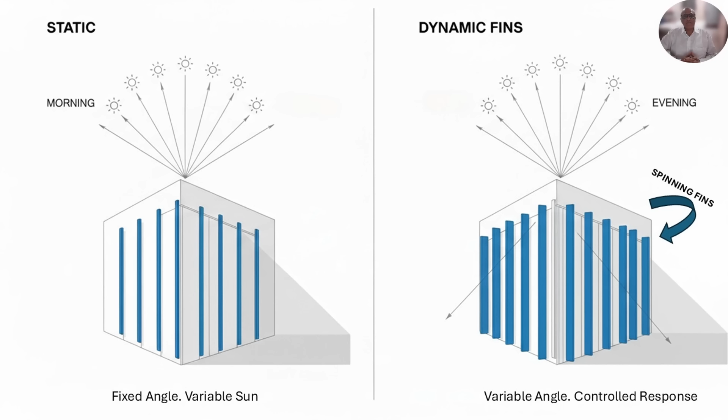On the left, a static system. The sun moves from morning to evening. The fins do not. So shading performance keeps changing, but the facade remains fixed. On the right, dynamic fins. The sun position changes and the fin angle responds. Instead of designing for a one-time condition, we design for the entire solar cycle. The difference is not movement, the difference is control.

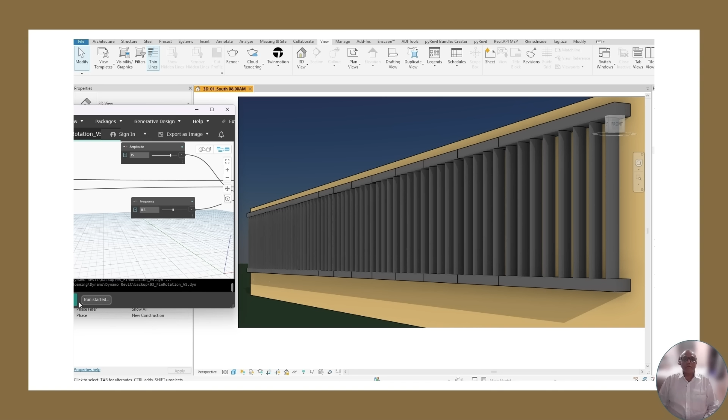This is not animation, this is model-driven logic. Here the time setting is changed inside the sun study. Each time the sun angle changes, a Dynamo script recalculates the required fin rotation. The fin color changes based on angle, so we can visually verify the response.

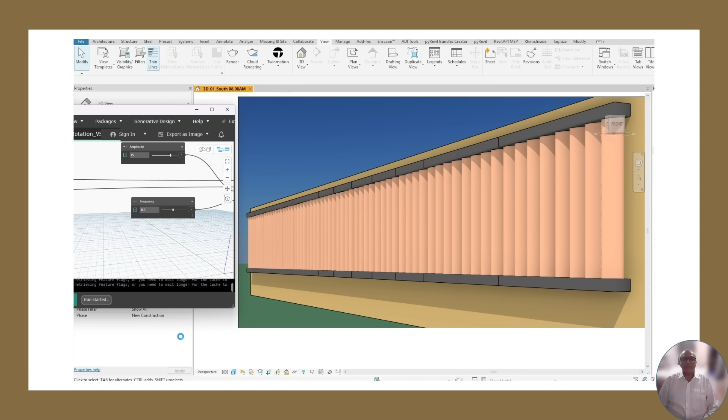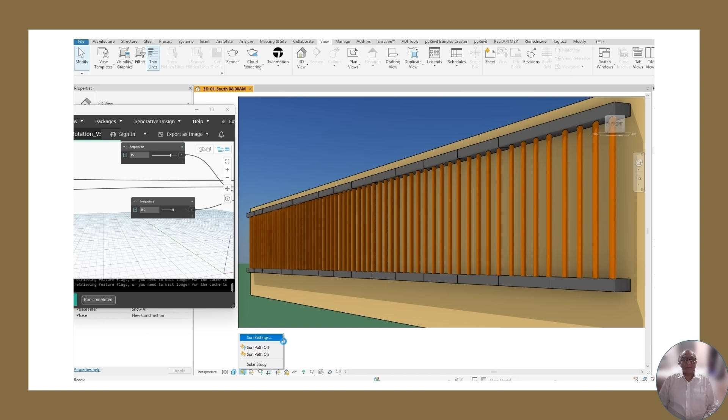If certain fins are not directly exposed to the sun during a particular period of the day, those fins remain at zero rotation for that duration. So the system does not move unnecessarily. It responds only where exposure exists. At the same time, the logic is flexible. The same framework can be configured in reverse, allowing maximum sunlight and natural daylight penetration when required.

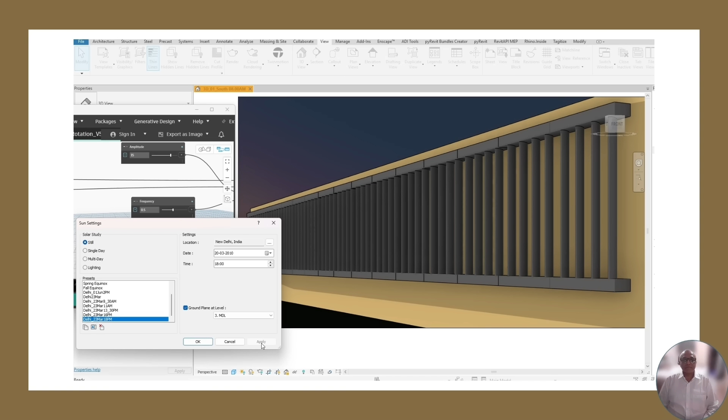This is BIM connected to computation. Geometry is not drawn manually. It is controlled through parametric logic. So the facade is not a static object. Rather, it's a responsive system.

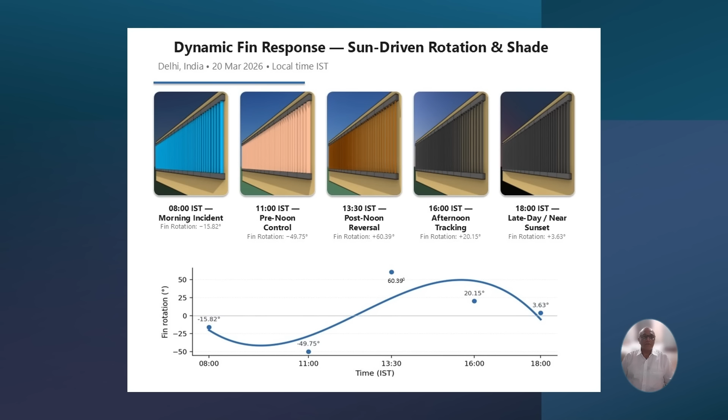Behind this rotation is a simple mathematical principle. As the sun moves across the sky, its angle follows a predictable curve. We use this relationship, similar to a sine function, to map time to rotation. So instead of arbitrary movement, each fin angle is mathematically derived. Time becomes input, angle becomes output.

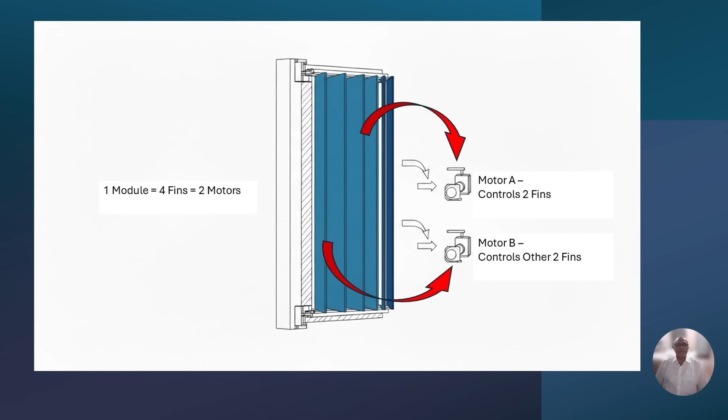Now geometry alone is not enough. It must translate into a mechanical system. We divided the facade into modules. One module equals 4 fins. Each module uses 2 motors. Motor A controls two fins. Motor B controls the next two. Instead of 172 independent motors, we structure movement in logical groups. This allows controlled wave motion, reduced load per actuator, and simplified maintenance. Design becomes buildable.

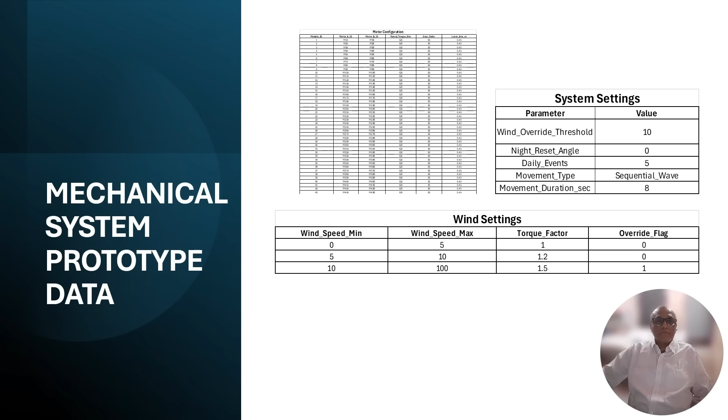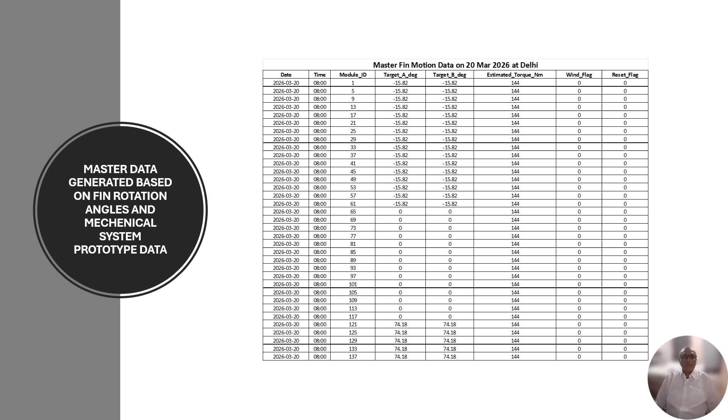All angle calculations are structured in sheets. The first layer computes fin angles based on time. The second layer translates that into mechanical rotation values. The third layer integrates everything into a master control sheet. So what you see in the model is backed by structured, traceable data. This means the facade logic is not visual only. It is programmable.

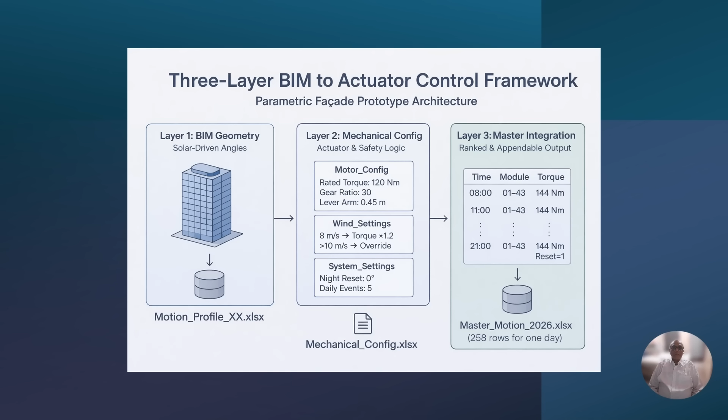This entire system works in three layers. Layer 1, solar logic. Layer 2, mechanical translation. Layer 3, structured data integration. BIM becomes the central coordination platform, from sun position to motor movement to control logic. This is not facade modeling. This is system design through BIM.

Systems like this are never the work of one discipline. It requires alignment between multiple experts. A facade consultant to define performance intent and envelope behavior. A structural engineer to validate wind loads and dynamic forces. A mechanical motion engineer to design shafts, bearings, and torque requirements.

An electrical engineer to ensure power distribution and motor integration. An automation or PLC engineer to translate environmental inputs into controlled movement. Now here is the important part. With the exception of automation, and in some cases a motion specialist, most of these consultants are already part of a typical project team.